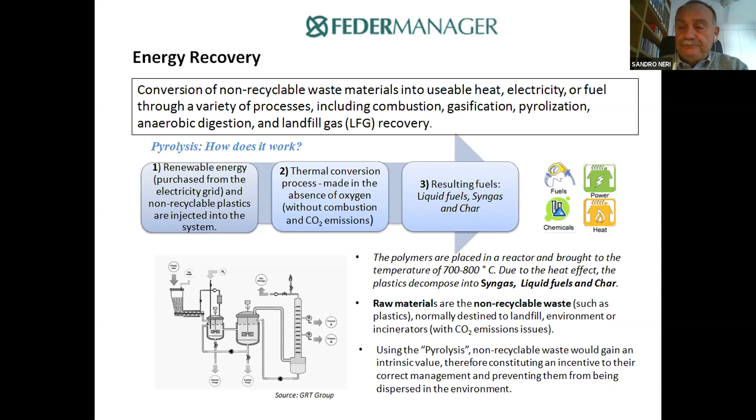Using pyrolysis, non-recyclable waste would become valuable, resulting in an incentive to its correct management and preventing it from being dispersed in the environment, causing pollution.

Energy communities are a way to organize collective energy actions around open, democratic participation and governance, and the provision of benefits for the members of the local community. The aim of energy communities is to move from a single concentrated generation to a distributed generation coming from an energy mixture composed of renewable energy, energy recovery, circular economy, and energy efficiency.

One possible configuration of an energy community is the exchange of energy between residential units in the same building. In this way, buildings can become aware prosumers and invest in improving energy efficiency, allowing residents to install photovoltaic systems. The direct exchange of energy would make electricity consumption more efficient by sharing electrical utilities and exchanging the energy accumulated for each user thanks to accumulators.

On top of this, distributed production is also useful for easing network burden, avoiding distribution overload, cutting down transport costs which double the cost of energy and penalize Italian companies, easing energy dispatching, and reducing network losses, achieving energy efficiency results.

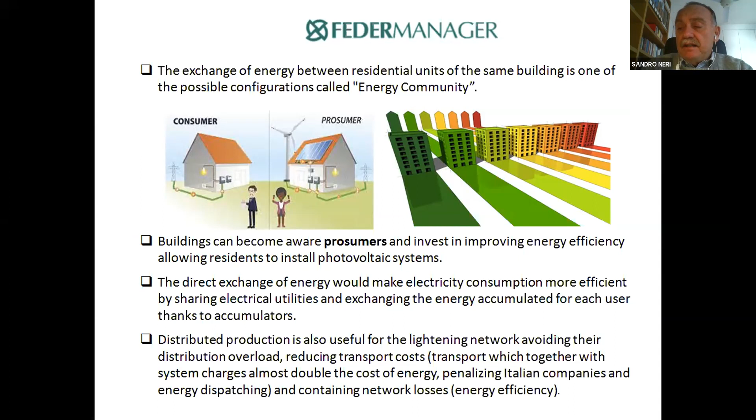In this positive scenario, it is fundamental to implement measures such as energy communities, capable of improving buildings' energy efficiency, reducing energy bills, and preserving the environment and the citizens' quality of life while creating new green jobs.

Energy efficiency will play a central role in achieving the 2030 targets of both Europe and Italy according to PNIEC. The actual achievement of this target will depend on the regulatory framework and how it will enable investments.

Energy efficiency needs investment, and crowdfunding could be an alternative finance tool that allows the raising of capital for a project or a company through a web platform. This is a possible solution to increase citizen participation in renewable energy investments and in energy community projects.

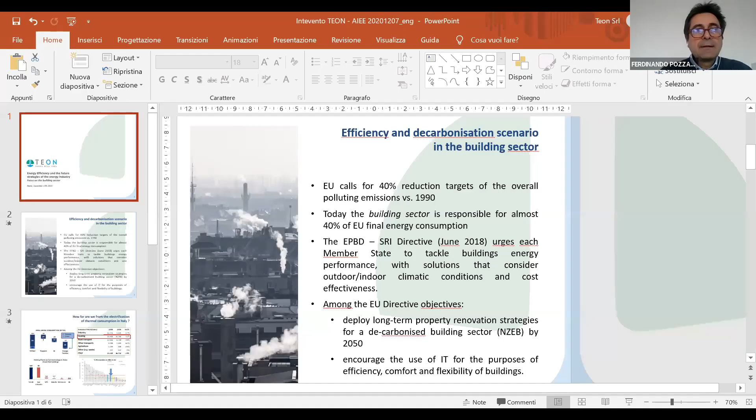Talking about energy efficiency, I'd like to draw a cone of light on a sector which traditionally has not been that outlined in the domain of energy consumption, which is thermal energy. It accounts in terms of consumption as much as electricity, and is mainly determined by the situation of our buildings in Italy. We have residential buildings, commercial buildings, industrial buildings - all of them consume thermal energy.

If we look at the reduction targets set up by the most recent Energy Performance of Building Directive in 2018, endorsed in Italy in 2020, this directive calls for a reduction of what is consumed by buildings, which now accounts for about 36 to 40% of final energy consumption. So it's a big chunk of consumption.

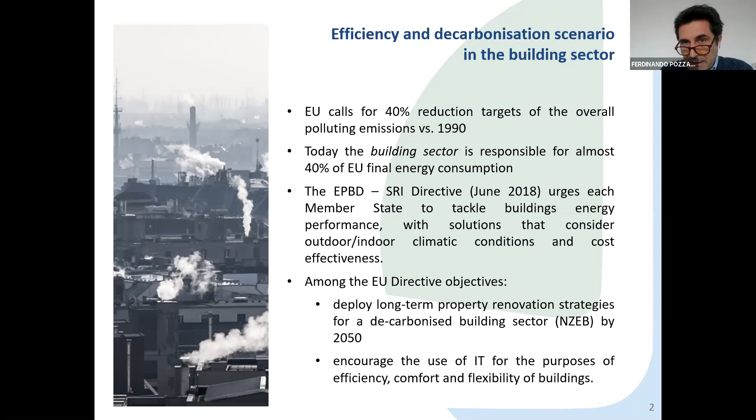How far are we from the electrification of thermal consumption here in Italy, and from the introduction of renewable energy in Italian thermal energy consumption? If we look at the data, they are not very comfortable. While some revolution took off for renewable sources in other domains, such as electricity generation with wind and photovoltaic, and in transportation with hybrids and electric vehicles, this cannot be said to have taken place so far in thermal energy.

When we talk about thermal energy, we talk about a range of 60 megatons of oil equivalent of consumption in Italy, out of which 11 can be accounted as renewables.

If we look at these renewables, there is a difference compared to the renewables we have in electricity generation, because in thermal energy, biomass is considered renewable, which from a regulatory point of view is correct. From a pollution point of view, of course, it's another story.

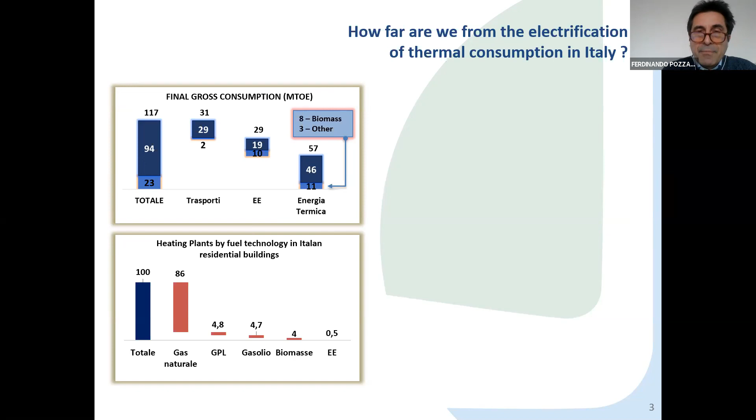If we look at the sectors and their contribution to particulate matter deployment in the climate, we can see most of the single sectors — although this data is not particularly new, the story has not changed.

All sectors have done a decent job intervening on efficiency and environmental performance, such as industry, which has reduced its contribution by 56.7%, though this is not only attributable to improvement in efficiency but also to a downturn in the economic cycle. Road transportation as well, also other transports, agriculture and others — every sector has gone through an efficient path that has produced results.

When we look at heating instead, we can see undoubtedly that its contribution to pollution has increased, not only in percentage terms but also in absolute values. As of today, it accounts for more than half of the pollution in terms of PM10 emissions. And believe me, things are not different if we look at other pollutants, or at greenhouse emissions such as CO2.

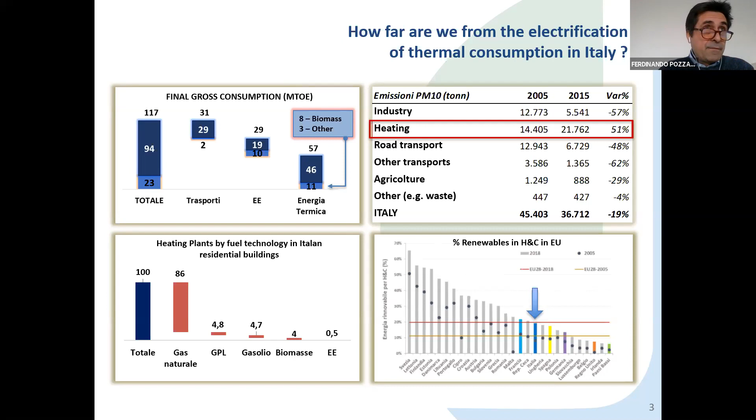Those 80 to 90% of buildings have been built according to standards which require high temperatures. And so far, the technology of high temperatures has been predominantly taken up by boilers and thermal plants fueled with gas, natural gas, gas oil, biomasses, and so on, therefore heavily contributing to emissions.

The technology of high temperature heat pumps—and I underline high temperatures because, as I said, the sizing of the terminals within the plants was set in a period when we had small surfaces of exchange, therefore requiring high average temperatures.

This can move this sector towards electrification, which means zero emission on site. So a totally clean city, if you think about it, plus it enables digitalization, which is most of the content present in the latest directive I mentioned earlier. This is part of the ingredients, a relevant part of the coordinates to move on a strategy for smart buildings, which is the enabling technology.

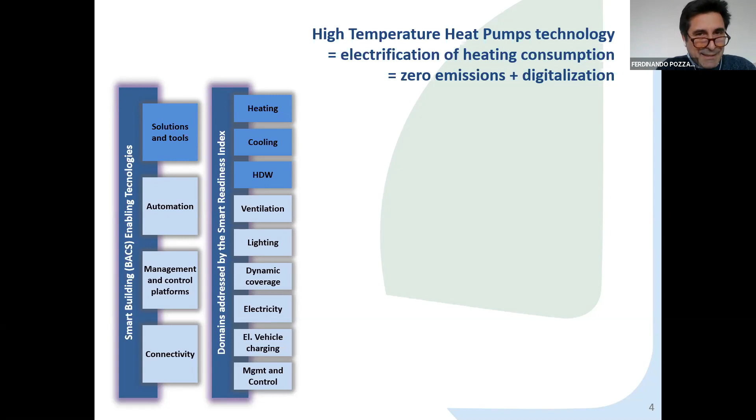But when we look at the consumption of a building, believe me that at our latitudes, the vast majority of a building's consumption relies upon heating and cooling. So what can be considered the benefits that proven technology now can bring on addressing the great majority of buildings, without the need for a virtual total abandonment of the terminals and refurbishing of all the plants?

There is, of course, as I said before, electrifying something—fueling with electricity on site something which is now fueled by gas oil or natural gas—which eliminates zero emission on site. Second, it reduces, thanks to efficiency—in the first bullet you see the COP, which is the yield that can be reached by these high temperature heat pumps in all conditions.

Above all, it reduces the primary energy consumption, and I will give you a taste of it—above all, it will save on the bills of the consumers.

Depending upon what we are going to substitute, we start from a 50% reduction of the gas bills used to produce heating when we talk about substitution with the electricity vector, and those percentages are higher when we talk about gasoil and GPL.

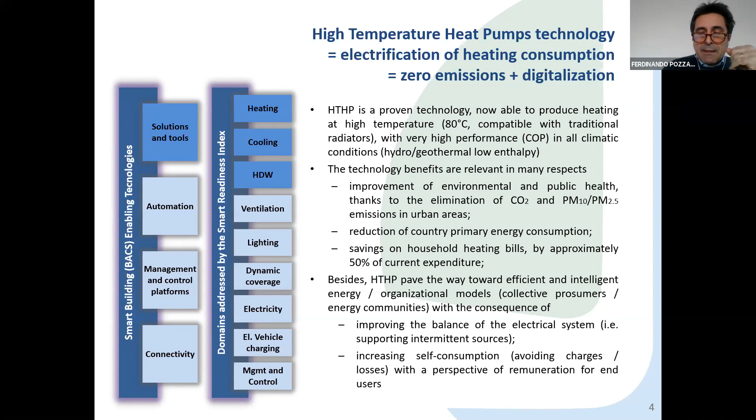To finish my intervention, I must say that these goals can be achieved, they are reachable. We are starting from a frontier where the potential that can be addressed is high, and the work that can be done is very high.

To give you a sense of this at a system level, this is work done by ARSE, the Italian Association of Heating Without Emissions, in a recent study. Out of 8 million residential buildings in Italy, if we only address 13% of them - having excluded milder climate regions and situations where geothermy or hydrothermy interventions are more difficult - we reduce the addressable potential to 25% of the current residential heating sector.

In Italy, we would be able to reduce 12.8 million tons per year of CO2 net. The net figure comes from considering the additional electricity production, which the study attributes to the marginal plant - the natural gas combined cycle - a prudent assumption, since in the next 10 years the marginal kilowatt hour probably won't be produced solely by a CCGT. But if you use the Italian mix, the data are much higher.

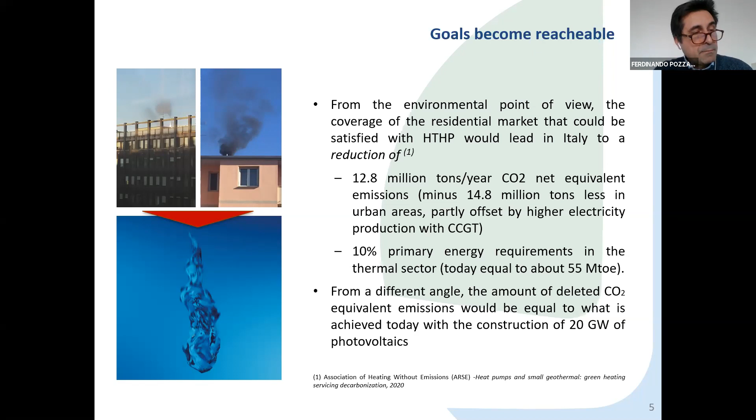This is it. I thank you for the attention, and my presentation is finished.